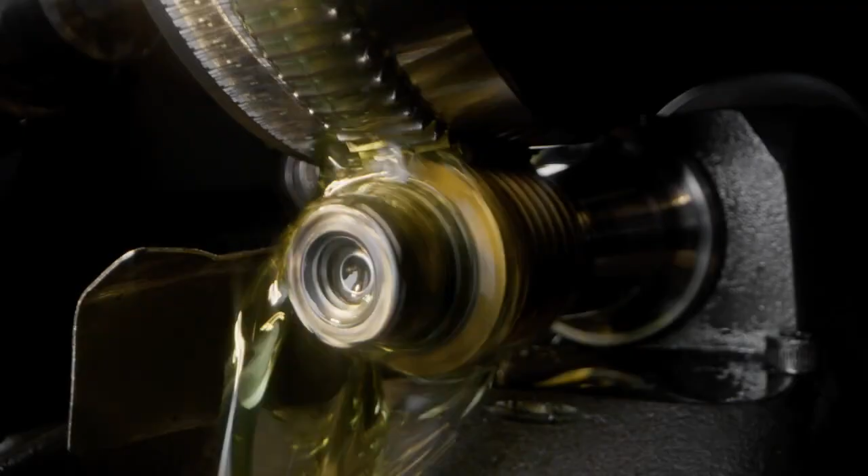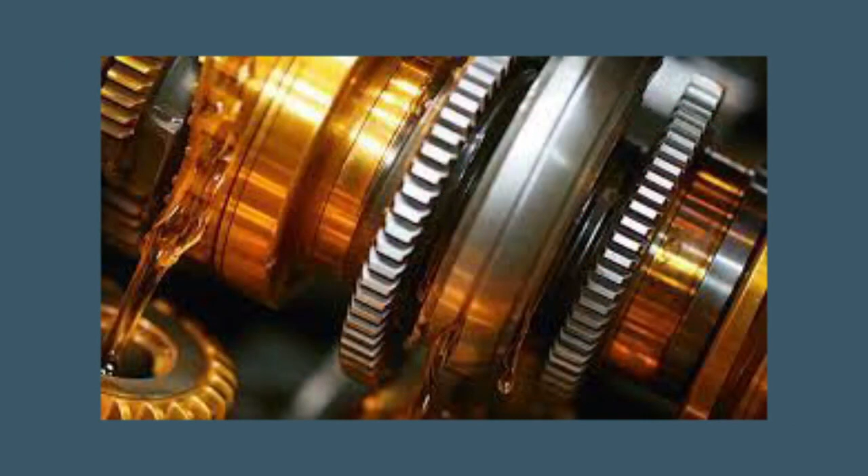The main purpose of lubricant greases is to reduce the friction of mating surfaces and the resulting wear thereof. Plenty of lubricants from various manufacturers are currently available on the market, with graphene-based lubricants standing out of the crowd. The distinctive features of this material include more reliable protection of surfaces from damage and deformation, as well as maintaining a low friction factor in both wet and dry media.

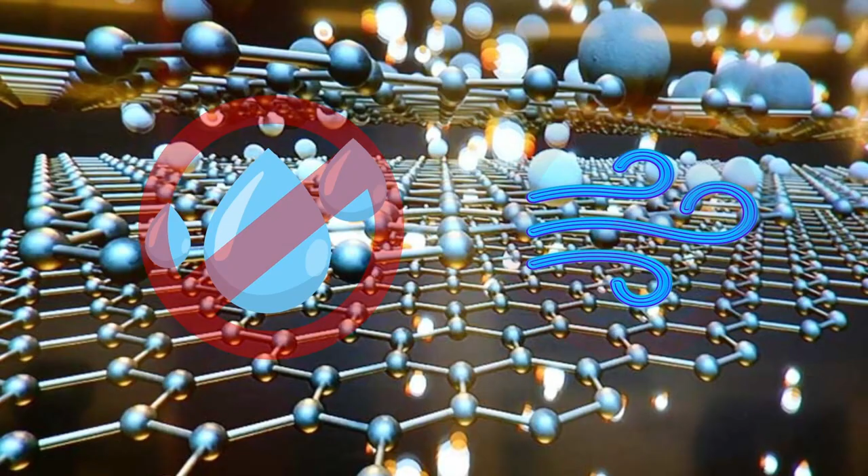Another useful property of graphene is its capability to repel water and obstruct ingress of air, meaning that it slows down oxidation processes on the surface of metals.

In general, a lubricant consists of a liquid base (dispersion medium), a solid thickener (dispersed phase), and additive compounds. The distinctive aspect of graphene is the possibility to use it both as a thickener and as an additive, ensuring good tribological properties of the lubricant.

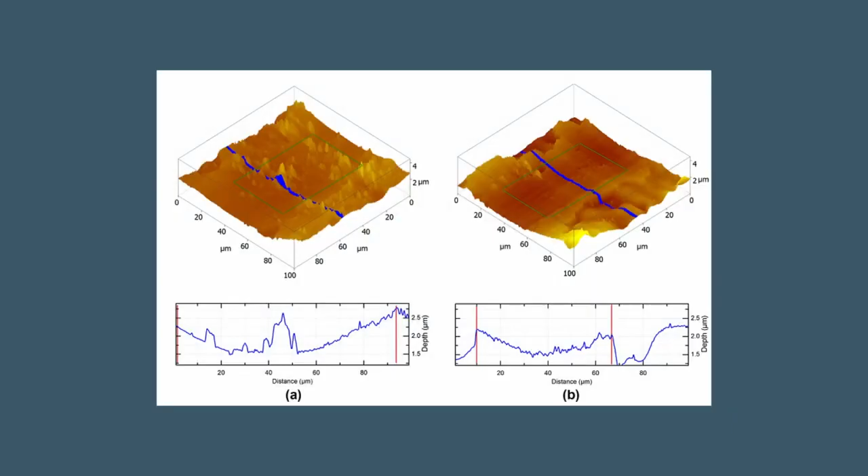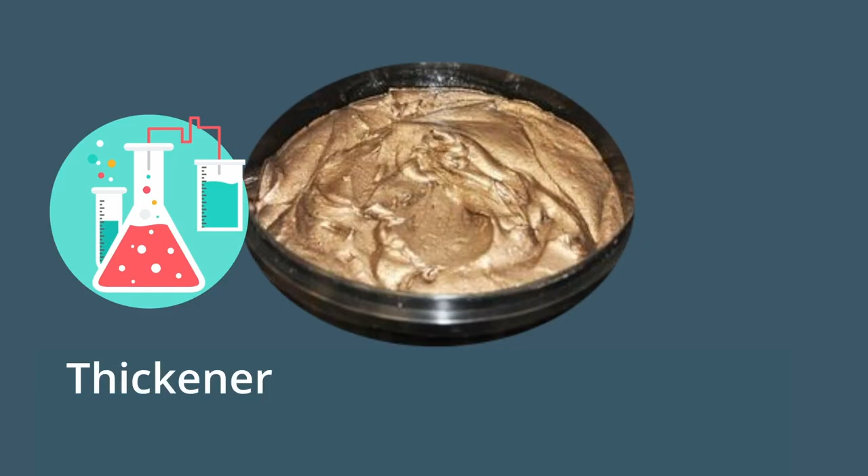However, these properties can only be attained if graphene is uniformly distributed throughout the lubricant volume, regardless of whether it is used in reasonably large amounts as a thickener, or in small amounts as an additive. Conventional mechanical agitators cannot cope with this task, which does not allow attaining the optimal tribological properties of the lubricant.

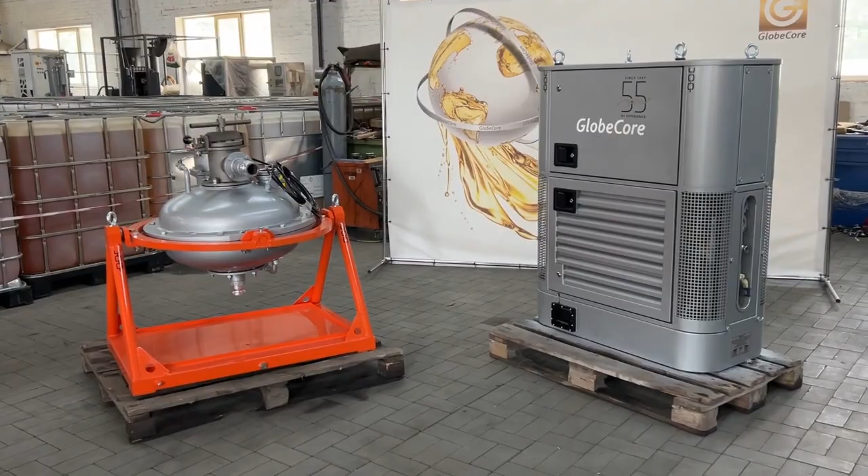Therefore, GlobeCore has developed an innovative technology for mixing and uniform distribution of graphene lubricant constituents, which is implemented in AVS Vortex layer devices. A Vortex layer device is a system that consists of a rotating electromagnetic field inductor, an operating chamber made of non-magnetic material, and ferromagnetic particles.

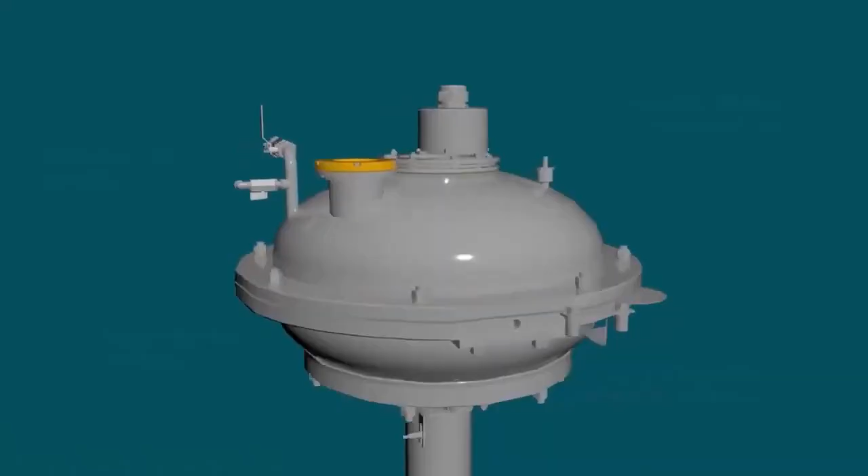The particles are placed inside the operating chamber, while the latter is located within the zone of exposure to a rotating electromagnetic field, which is induced after applying voltage to the inductor winding. Driven by this field, the particles begin to move and then collide with one another and the operating chamber walls. Therefore, the particles' motion trajectory becomes complex.

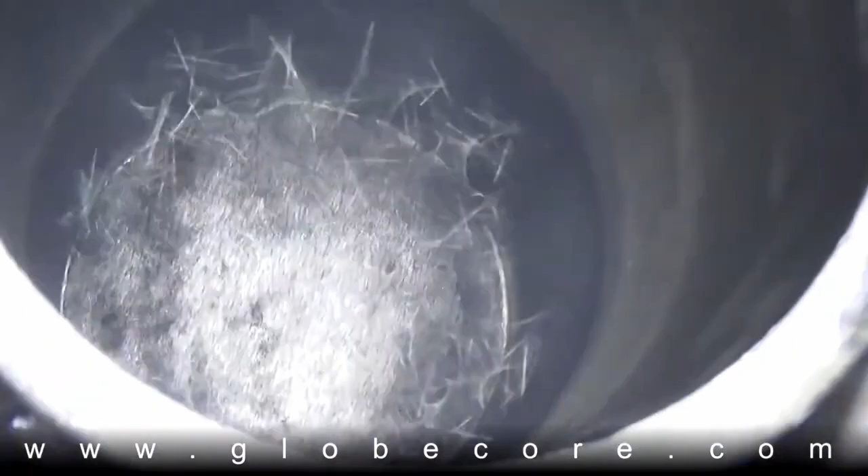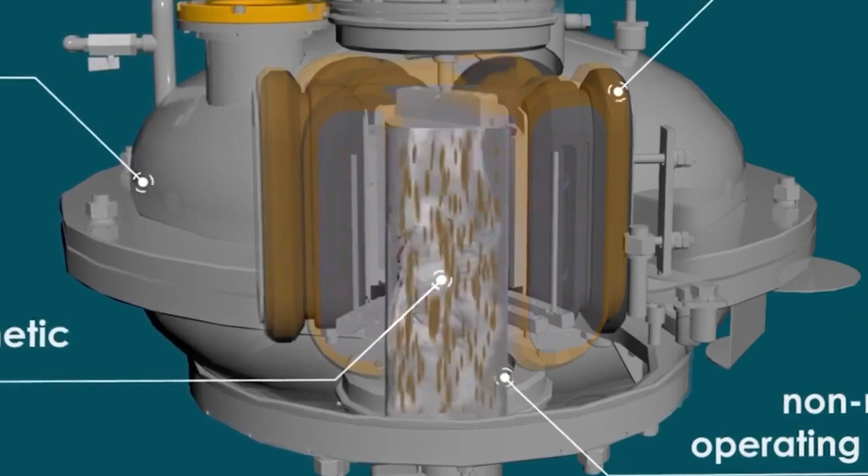In this case, various phenomena simultaneously arise in the operating chamber and contribute to efficient processing of graphene lubricant in a matter of seconds: acoustic vibrations, cavitation, the rotating electromagnetic field, and the mixing effect of each ferromagnetic particle.

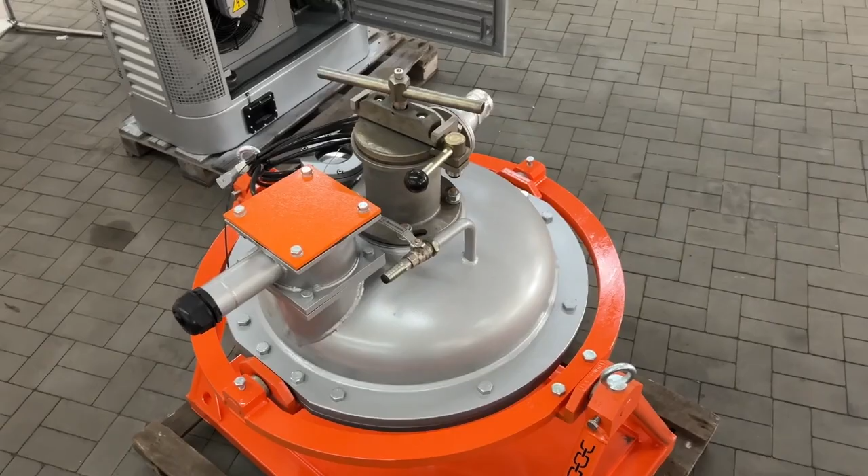These factors ensure efficient mixing of constituents and their uniform distribution throughout the lubricant volume. This is very important when graphene is used as an additive in an amount of, let's say, 0.1%. In this regard, AVS is unique equipment, because it uniformly distributes even such a small amount of substance throughout the lubricant volume.

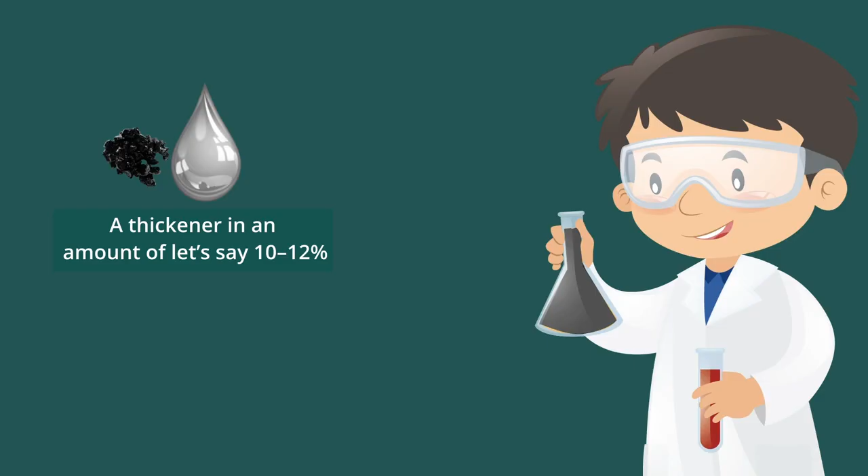If graphene is used as a thickener in an amount of, let's say, 10-12%, the constituents can be pre-mixed using conventional agitators, and the resulting mixture can be further processed in a Vortex layer device.

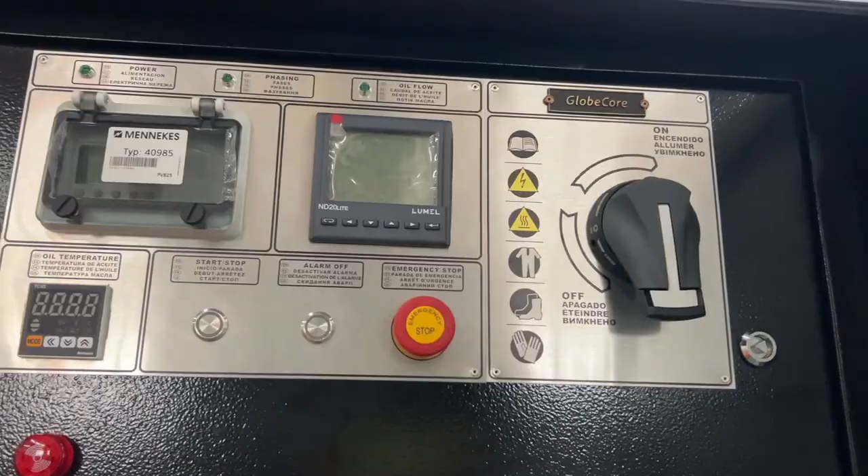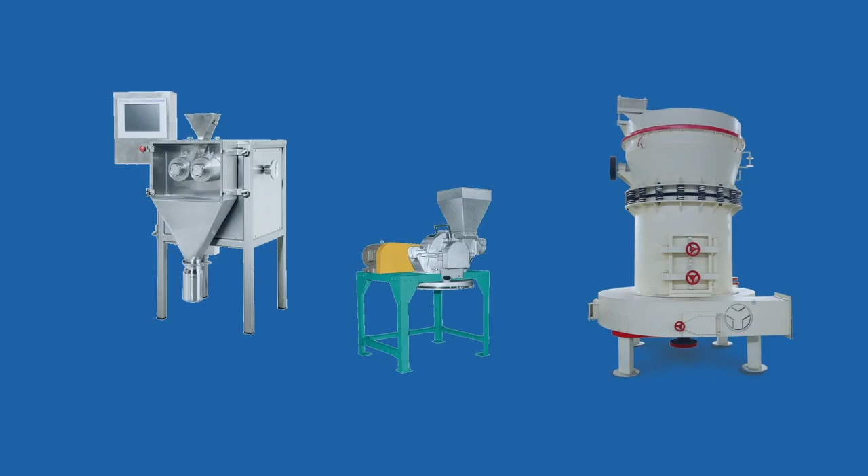The use of Vortex layer devices in graphene lubricant production improves the tribological properties - friction factor and wear coefficient - of the lubricant compared to the same properties attained by means of other equipment, mixers and mills.

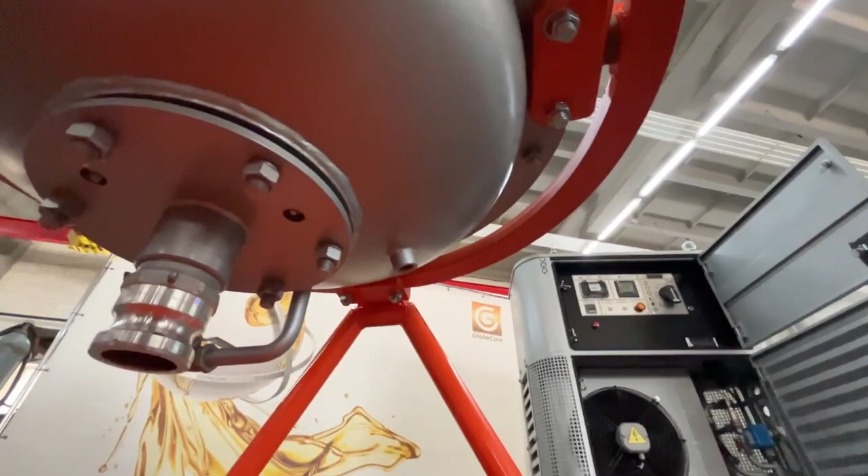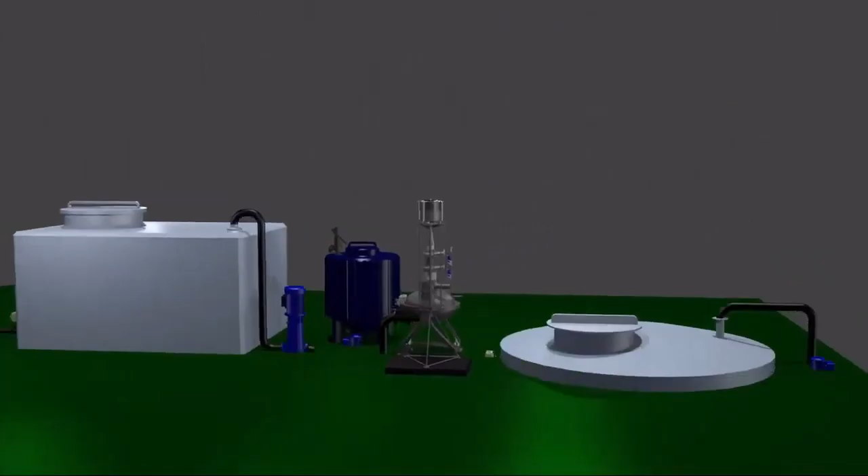The additional advantages of Vortex layer devices include power saving - the power consumption of the device is much lower than that of mechanical agitators - on-stream mixing of constituents, which allows saving production space due to ceasing to use large-dimensioned mixing tanks, ease of maintenance and operation, ease of integration into existing technological lines for lubricant grease production, and durability. The service life of the devices, depending on the operating conditions, may measure up to decades.